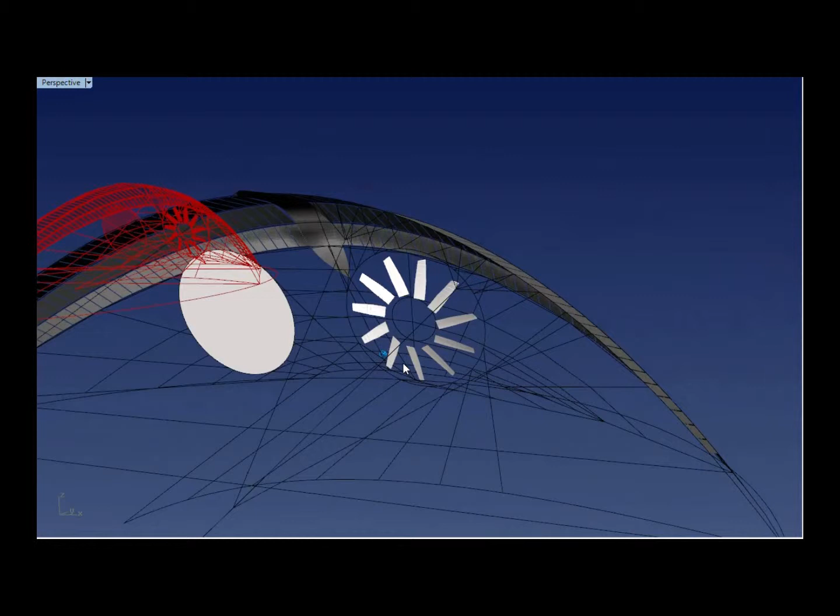Another possibility shown here for extracting continuous power with soft kites from a Mothra design is the standard sort of windmill configuration, but this with soft kites would require setting and tensioning of soft kites front to back.

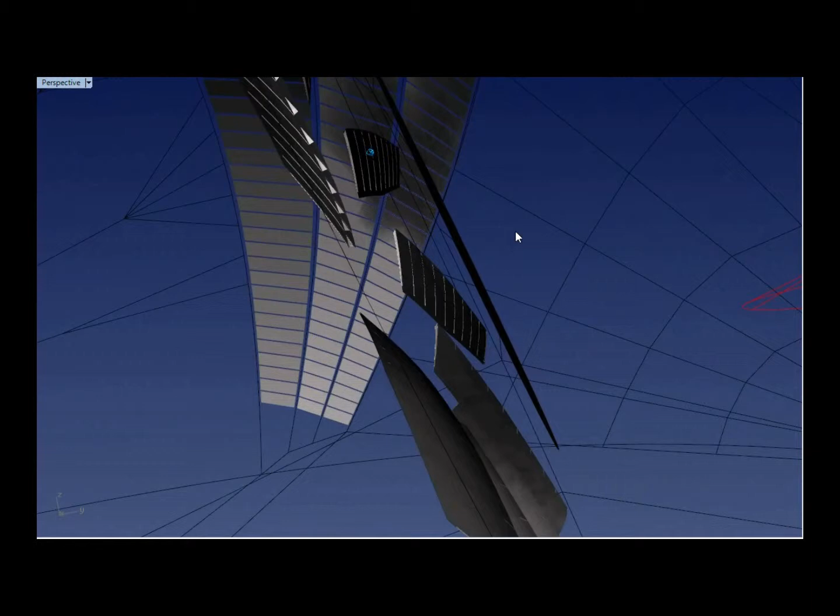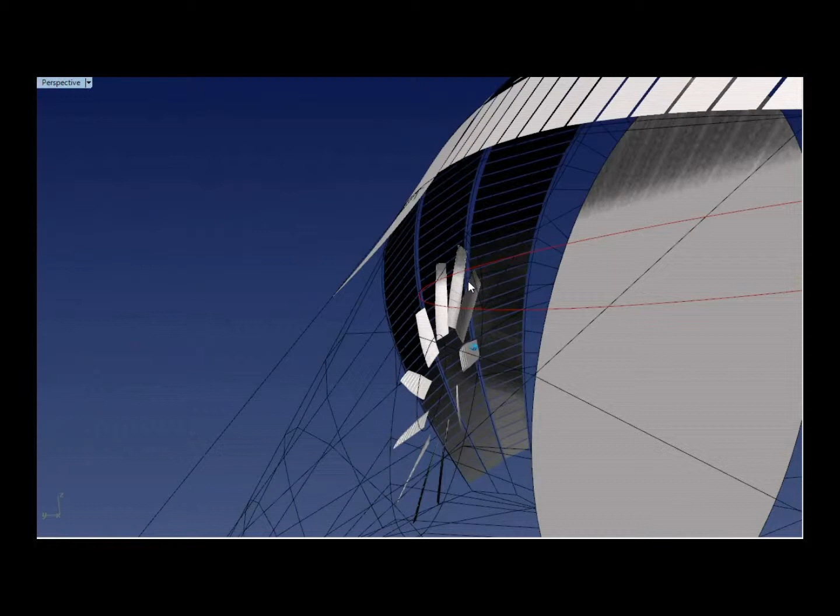I've got these fairly simplified models of soft kites here, ram air setup. If they were to run around this ring - this ring is set in place on the framework of the Mothra, so some of the front of it is tied up to front catenaries, back is tied off to back points in a sort of a web around the Mothra, so it's almost supported. So it would take a bit of a buffeting, but I'm not sure how rigid this would remain without a wee bit of strengthening within it.

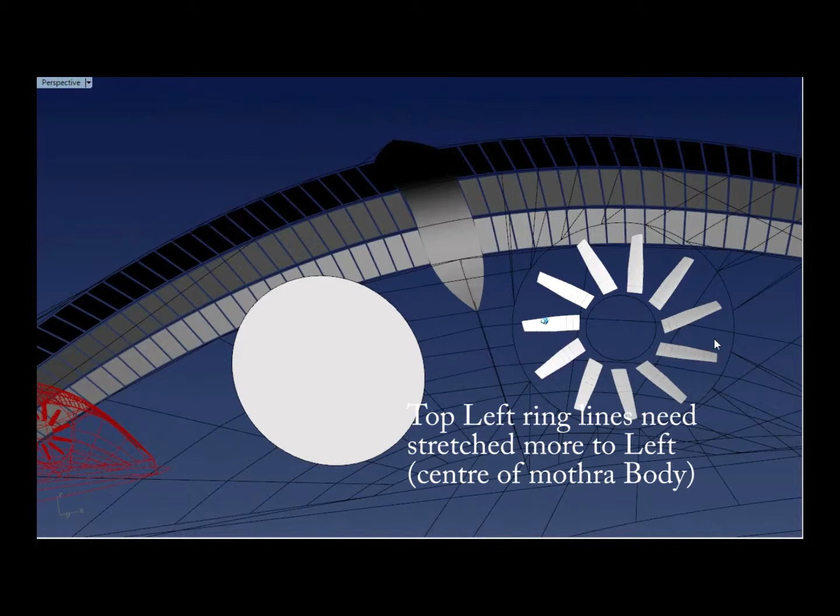Actually, these lines should be going off more to that side there. I could move that over. The reason I've got two is it sort of fills more the shape of your average Mothra. I think if you were to put one circle in there, it would be fairly wasteful.

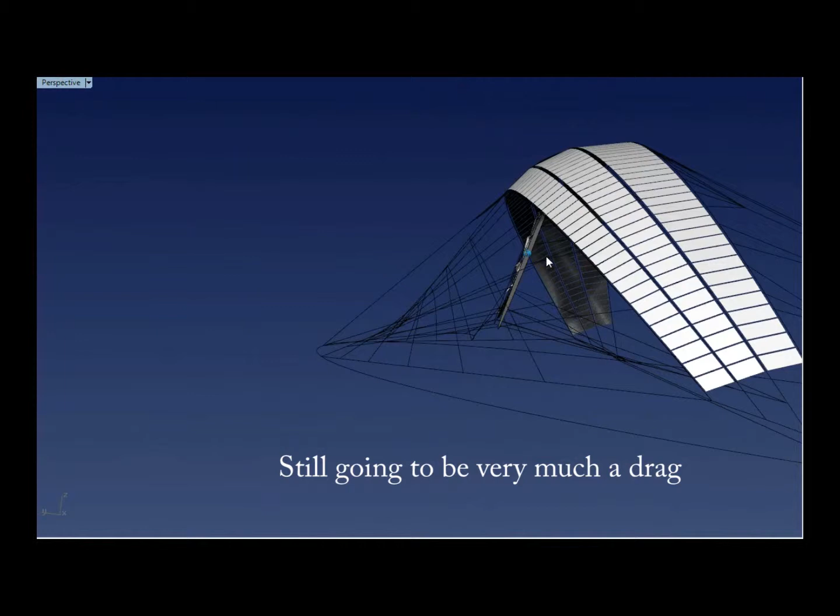Of course, there's been suggestions of filling it with a mesh of hundreds of little blades in a face. You can have an awful lot of drag backwards. I've tried to tilt these forward into the wind, so there is a slight lift component to them - they're not purely pulling the whole Mothra shape downwards and backwards.

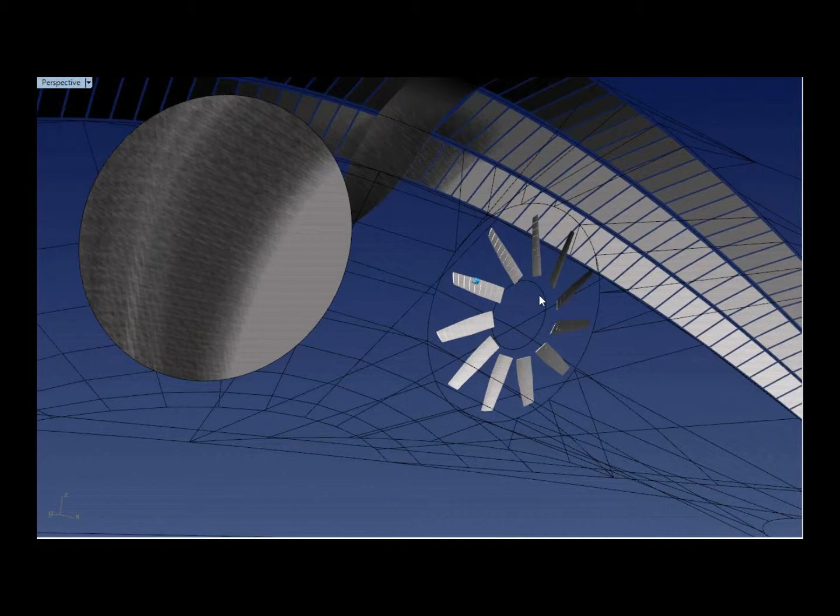This configuration would need front to back tensioning as well, so you'd maybe need to again tie onto the back line, or have it come down forward onto either a turret or a guide.

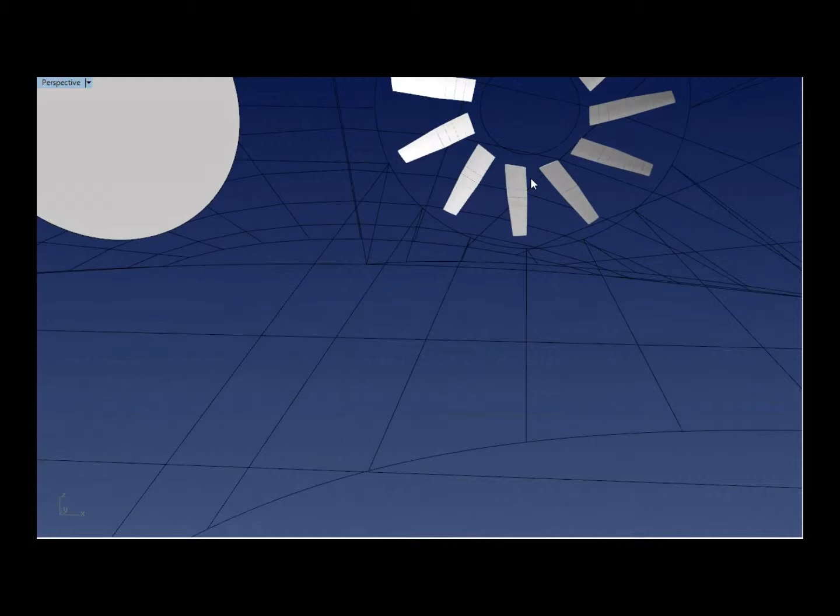You're going to need something to hold these forward, so it's not a very developed idea yet. You're going to need either rings or rollers to run the outside around there if that's going to work.

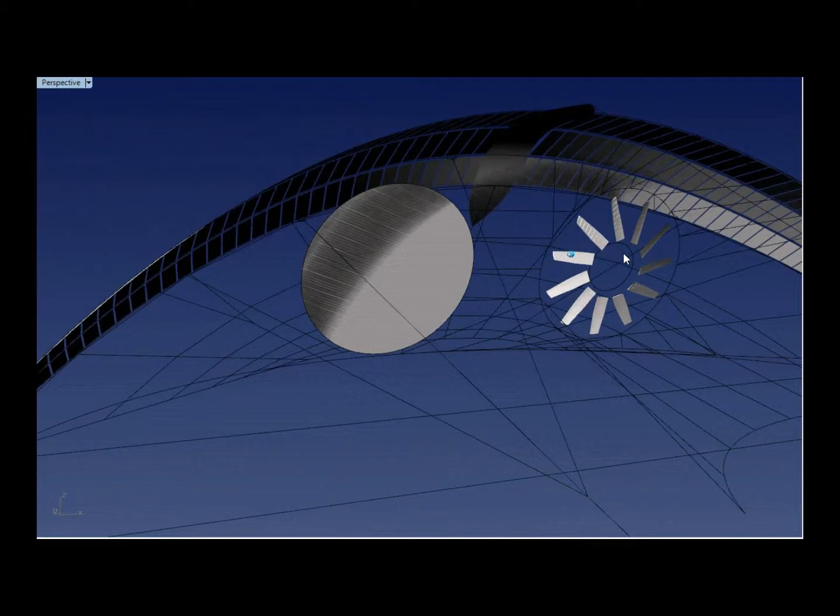So I think it's looking very complex to try and fit that sort of configuration inside underneath a Mothra, unless you have very small rigid wings in arrays.

Fitting blades under there is not going to be easy, and to get a smooth operation out of this, I think it's going to be pretty tough.

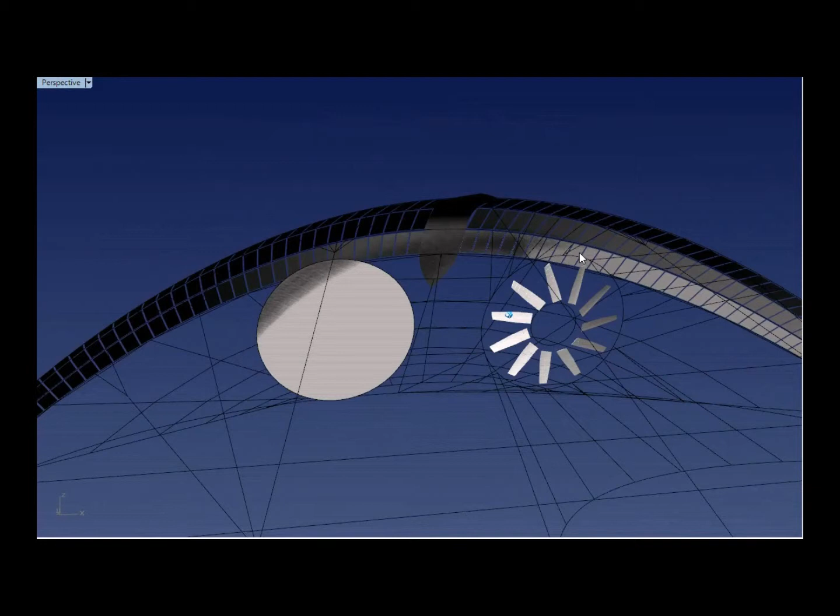It may be that if I had a single circle and pulled to a turret in the center, that could be quite sustainable. It could be quite good.

You might be able to fly the Mothra slightly taller with having this front tethering and back tethering. It might be easier to set a shape that holds fairly tall.

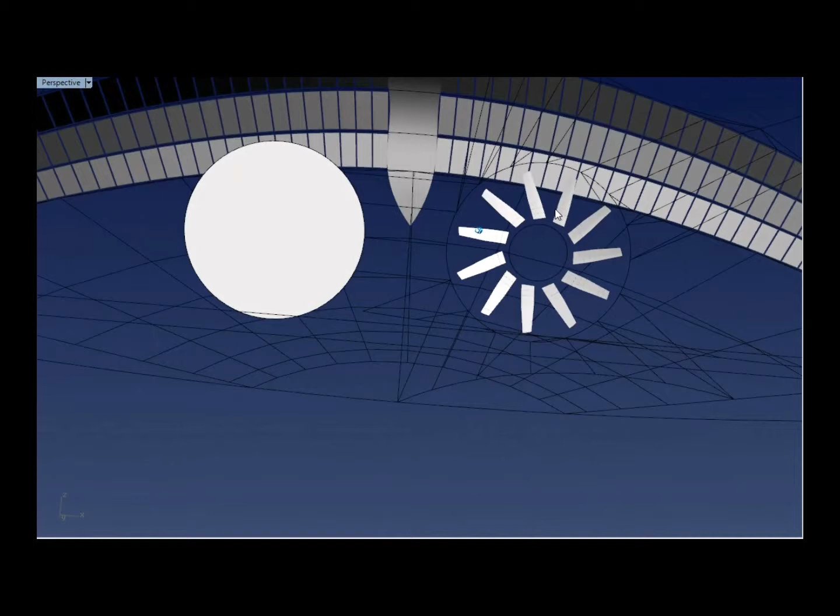Yeah, I think a single one in the center with a few layers of rings going backwards may well work okay. We'll see if there's a way we can maybe make that taller. I guess we'd have to test with the flying - that could help out. I'll get to drawing some other schemes now, I reckon.